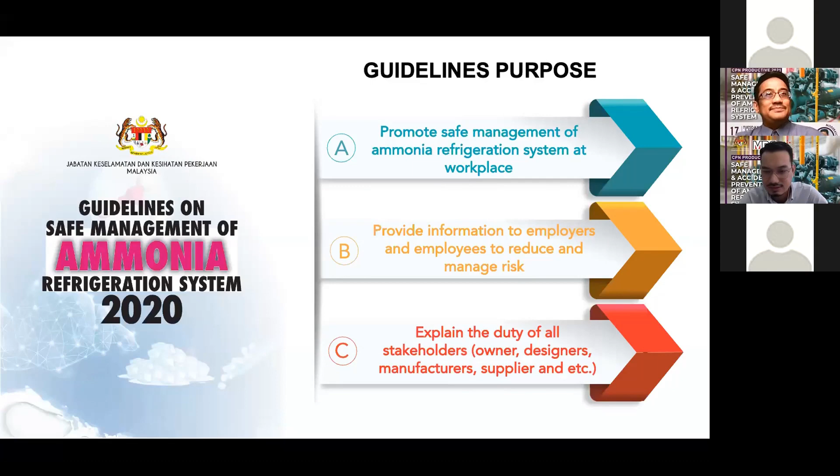Secondly is to provide information to employers and employees to reduce and manage risk, especially with respect to the ammonia refrigerant.

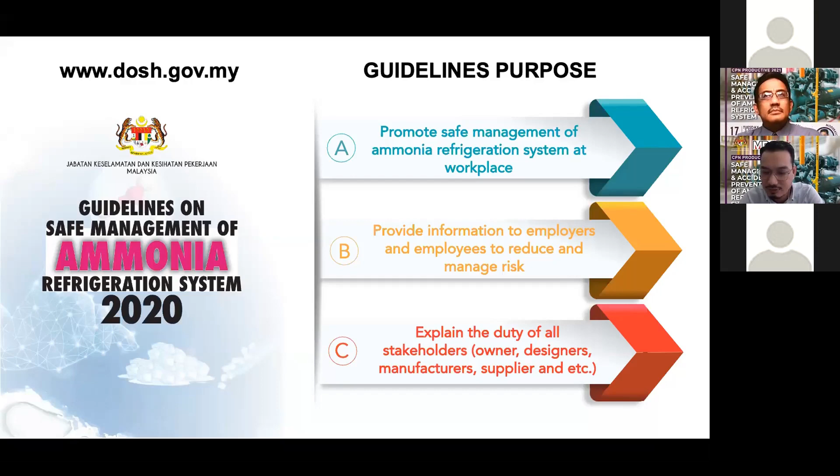Okay, so our focus is for the small medium enterprise, especially for the ice making industries, artificial ice making industries. But if this is applicable to your workplace, you might look into the elements of the guideline also.

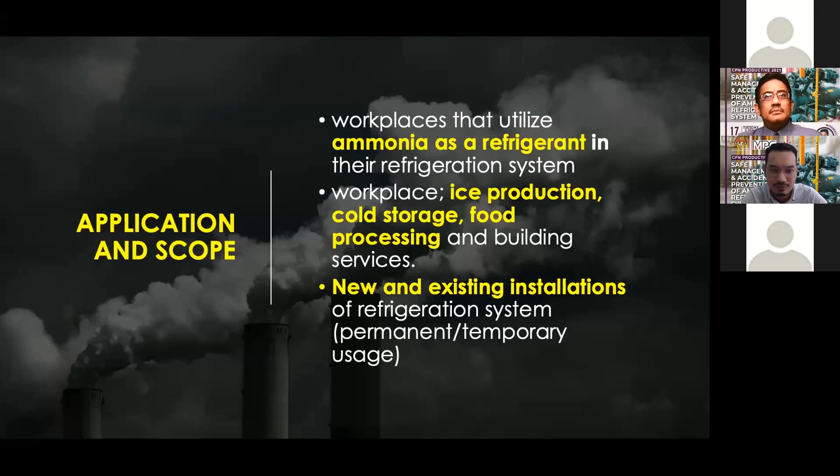Okay, first of all, this guideline highlights the mandatory requirement under the Factory and Machinery Act, which the owner needs to comply with if they have especially certificated machinery, then they have to comply with the FMA Act.

And for the workplace, the OSHA, Occupational Safety and Health Act, comes into place to ensure that the owner of the workplace who creates the risk is able to manage the risk to protect their workers from any accident arising from their undertaking.

Other than these two main acts, there are regulations that describe more details on each provision of the acts, for the FMA and OSHA 1994.

Just for your information, this FMA will no longer be enforced, and it will be terminated. And the new OSHA will cover, I think, most of the provisions currently enforced under FMA.

And I think the first reading of the bill already went to the parliament for the first reading, and I don't know, in the future the Factory and Machinery Act will no longer be enforced by the DOSH.

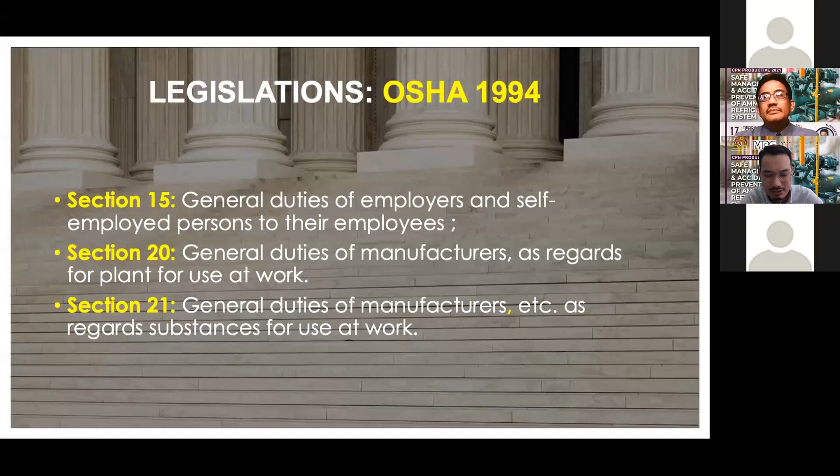And then apart from both Acts, there's a regulation supporting both. Under the OSHA, there is Occupational Safety and Health Control of Industrial Major Accident Hazard, known as CIMAH Regulation 1996. This is especially for chemical plants and major hazard installations.

And then the Use and Standard of Exposure of Chemicals Hazardous to Health regulation, 2000. Of course, ammonia is one of the hazardous chemicals to health.

And then for the suppliers, they need to comply with the Classification, Labeling, and Safety Data Sheet of Hazardous Chemicals, known as CLASS regulation 2013.

And there's a new regulation regarding noise at the workplace. Actually it's not new, but there's a new version. Before this, it was enforced under the Factory and Machineries Act. Now noise exposure is under the Occupational Safety and Health Regulation 2019.

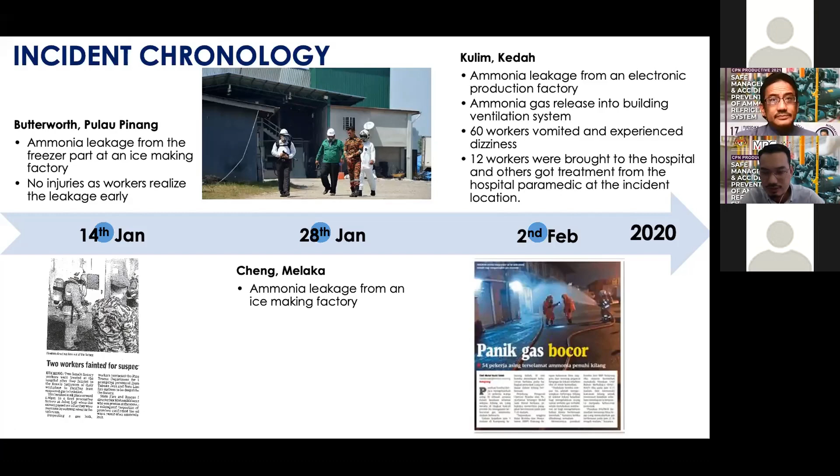Then in 2019, there's one case in Kajang. This, the public was exposed to the ammonia while shopping adjacent to the factory.

You need to know, sometimes this ammonia ice making factory is just a shop lot building. It's not a proper factory building. And he was stable after getting treatment from the hospital.

And in 2019, there's one case I will share in detail with you. It happened at a poultry processing factory. 26 workers experienced breathing difficulty, while nearby, about 120 students from a nearby school were evacuated. Luckily, no student was affected.

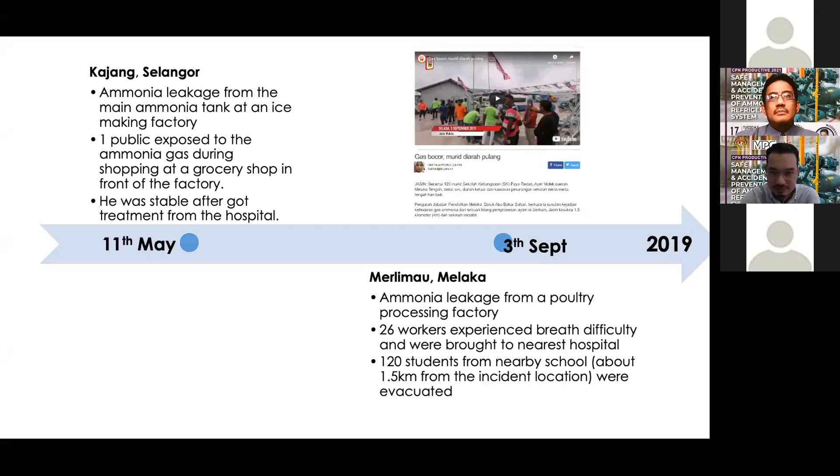Back in 2018, there were 3 reporting cases. Actually 2, but for Shah Alam, it's the same location, same facility. The first on 30th August, 2 workers dead. This one, when I was in Selangor State Office, I was involved in the case, and 18 workers were injured due to breathing difficulties. All of them were foreign workers from India.

One case happened in Perlis, also from an ice making factory. Two were hospitalized. For the third case in 2018, same facility, 3 days after the cases there was a release of ammonia to the school nearby the factory, and this affected 4 students from the school.

In 2017, there were 3 reporting cases. The first one involved also an ice making factory, 3 people brought to the hospital. One happened in Sabah, one worker fainted, and the other one also an ice making factory, where 3 workers were seriously affected and sent to the hospital.

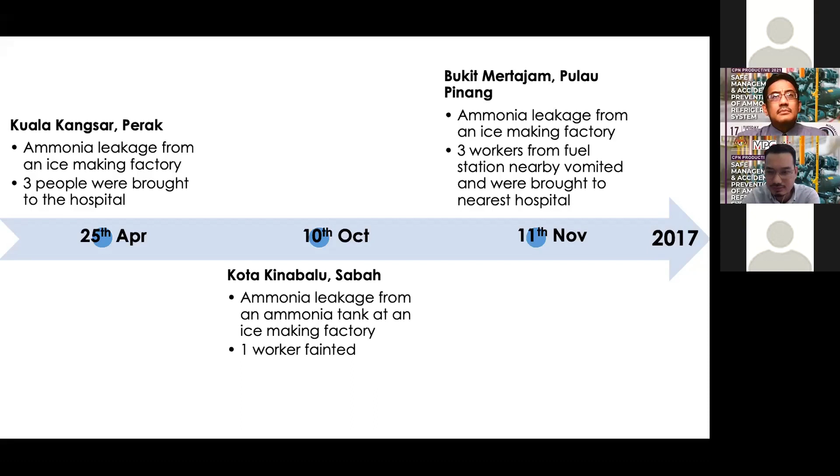In 2016, there was no reported case. In 2015, there were 2 cases. One also an ice making factory, which involved the public - 50 people from 4 families were evacuated. And one in Selayang also involved this ice making factory. This is the reason why we focus on the ice making factory.

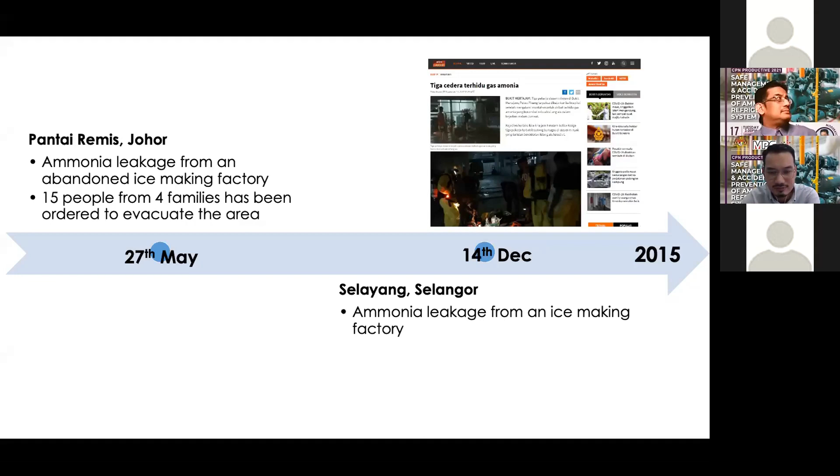We see that most of the cases occurred from this premise. Okay, so this is our plan to improve, addressing some of the questions from the participants.

So at the early stage since 2019, we have developed a quick guide to handle ammonia leaks. This is because of the alarming situation. We published a guideline first, and then we had a series of workshops with the ice making factories nationally. There were a lot of workshop series. We called all the ice making factories to involve with the workshop to get their input.

And we also have research with UPM to study the issues. And then we focus our enforcement on the workplaces that use ammonia as the refrigeration system. This is not only for the ice making factory, but also other factories that use ammonia. And then we have issued the DOSH instruction letter to the respective industry. I think this was back in 2019.

And from that year, we developed this guideline. I was involved with this committee to draft the guideline because I was involved with many cases involving accidents. So my input has been put forth in this guideline. Also, I shared some case studies in the guidelines. And we had an awareness program before the completion of these guidelines.

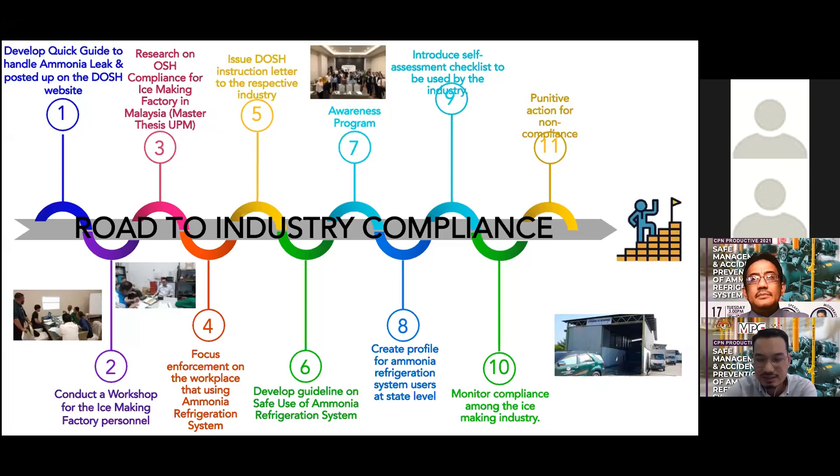Okay, in this guideline, we highlight the stakeholders' duties and responsibilities, especially the designer, manufacturer, installer, owner, and also the ammonia supplier.

Okay, for the designer and the manufacturer: first, for the refrigeration system, they must ensure they comply with our relevant legislation, and it must be constructed and safely designed. For the refrigeration system, some of the machinery requires design approval by DOS. We also do design approval, and the setup of the operation system must be safe with a proper manual provided, and they need to resolve any technical issues arising from the installation of this system. And of course, to ensure the long-term stability and safe handling, they need to prepare the maintenance program.

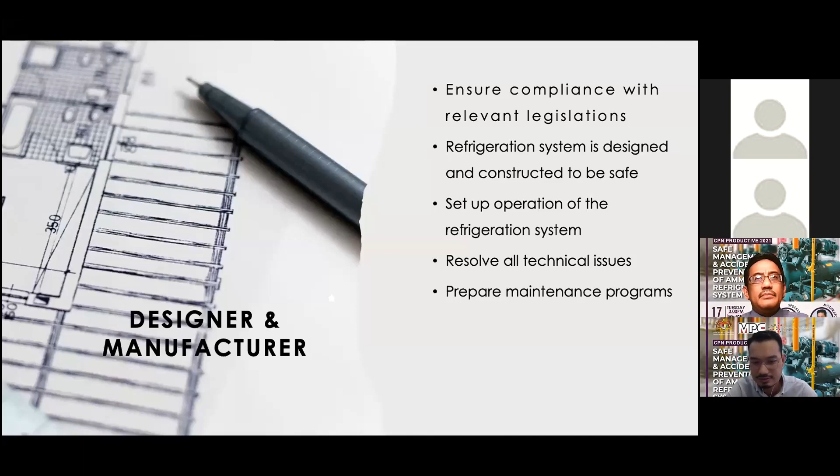Okay, then we highlight the duty of the supplier and the installer of the system.

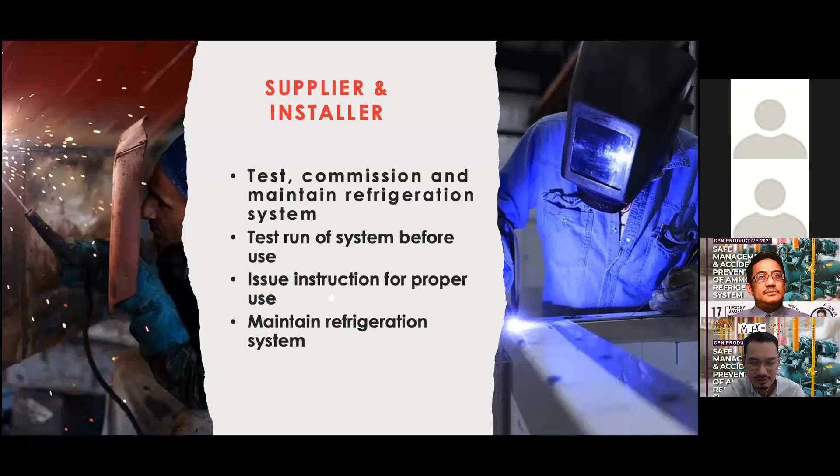They need to test, commission, and maintain the refrigeration system. Test run of the system before they use it - this is for the commissioning. And issue instruction for proper use, I mean the manual for the safe use of the system, and to maintain the refrigeration system.

And for the ammonia supplier, they need to be aware of the labeling and the safety data sheet to supply to their client. They need to develop SOP and risk assessment, especially during the transfer and filling of ammonia to their client. And they need to obtain the permit to work, PTW, from the owner before they do anything. And also provide training to the ammonia handler.

This is a requirement under the regulation of OSHA.

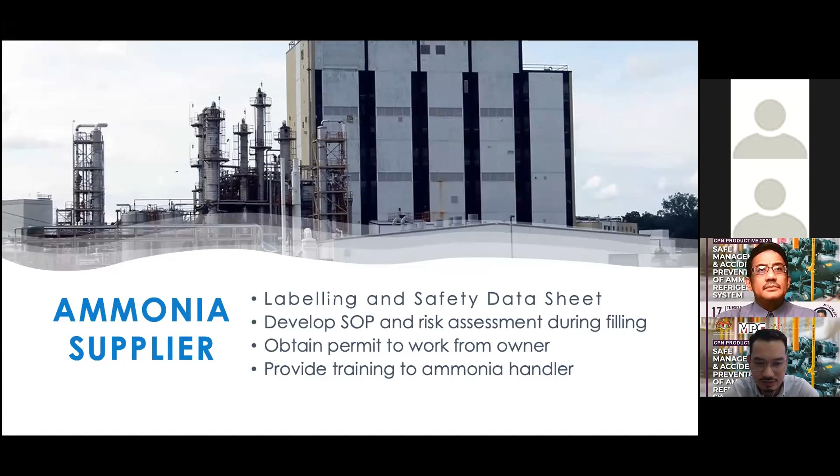And then, of course, the owner - there's a lot of things he needs to ensure their workers are not affected by the refrigeration system. First, they need to have the risk assessment and also the chemical health risk assessment, CHRA. This is the first thing they need to do.

And then the maintenance and inspection of their system must be adequately conducted. And for the documents, they must keep and maintain, especially when there's a request from the authority. This will be helpful when they repair their system.

And then for the workers, they need to provide proper PPE. And then you need to develop the safe work procedure, emergency response plan, of course. And the information and training they must provide to their workers.

And the accident reporting - some of the cases, when we investigate, it was not reported by the owner, but it was reported in the news. Then we do the investigation because this is a requirement under the notification of accidents.

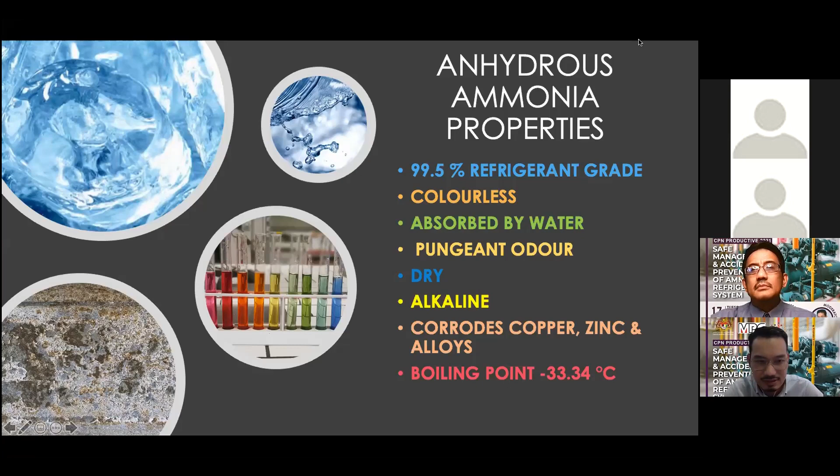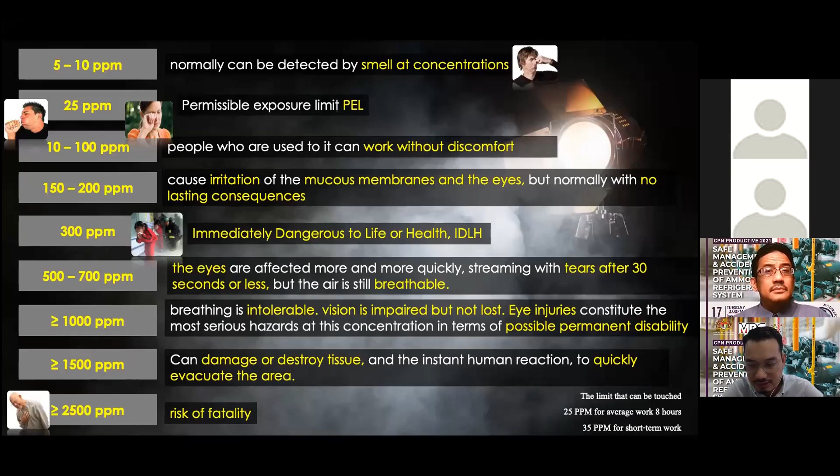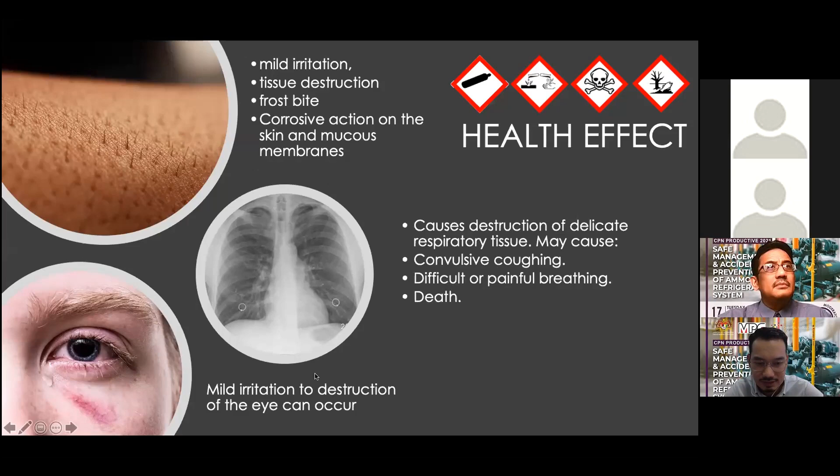Okay, this is the effect on your body. For the skin, you have mild irritation, can cause tissue destruction, can feel like frostbite, and corrosive action on the skin and mucous membranes. For your lungs, it can cause destruction of delicate respiratory tissue, convulsive coughing, difficult or painful breathing, and may also cause death. And for your eyes, it might cause mild irritation to destruction of the eyes.

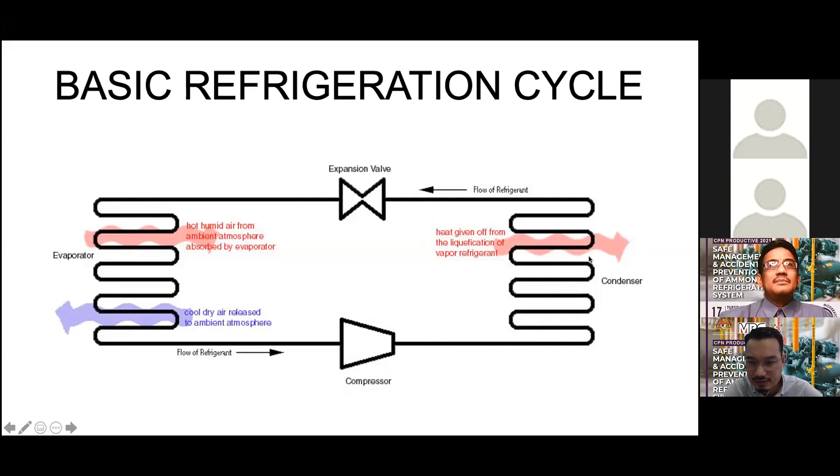Okay, this is the typical system, a single stage refrigeration system, which has the expansion valve, the evaporators, receivers, liquid separators, condenser, and compressor. It will be interchangeable from the vapor: low pressure vapor will be compressed into high pressure vapor, will circulate into the condenser, and come in as high pressure liquid. It goes through the expansion valve, and will flow through all the system for evaporators to produce ice or to cool our food products.

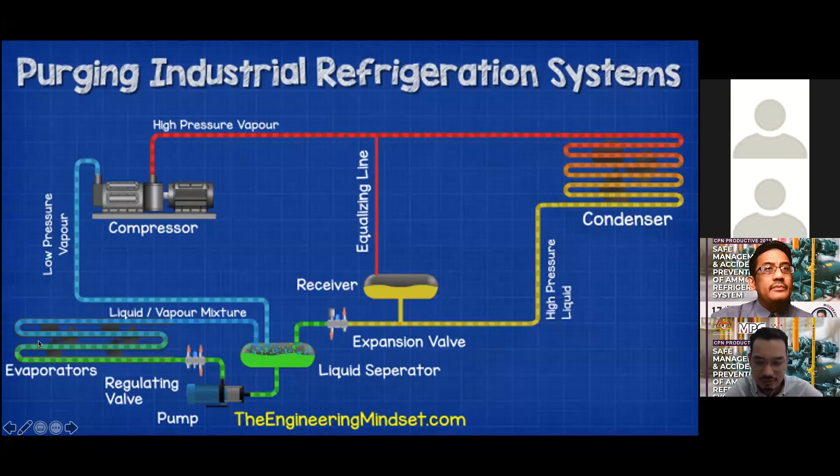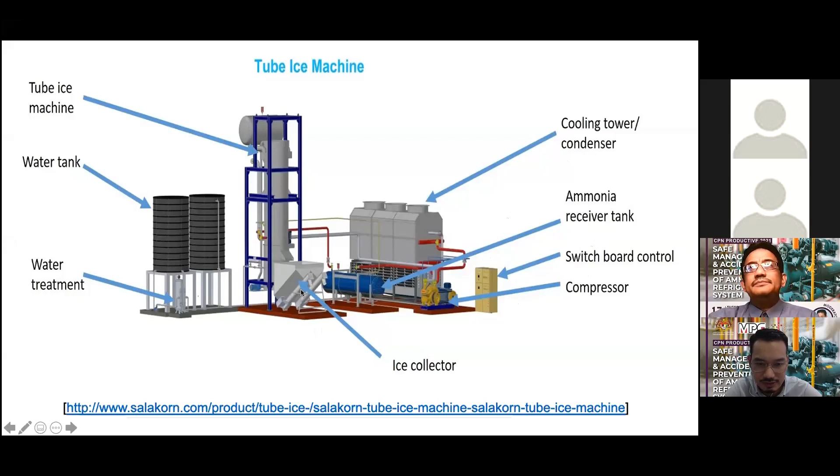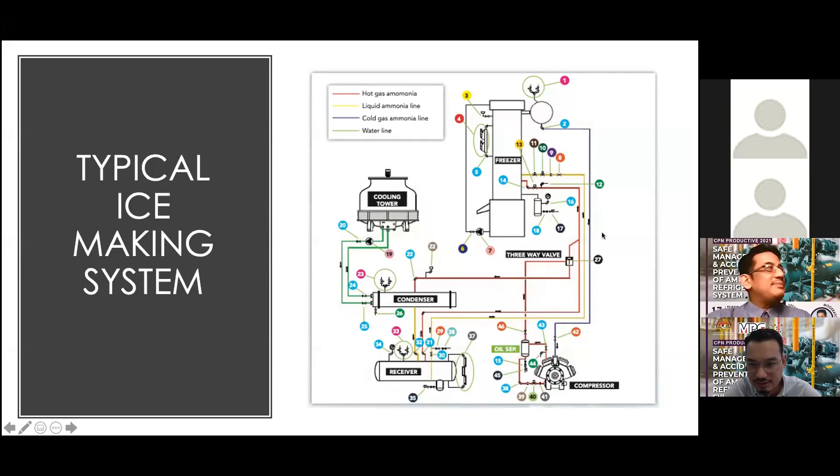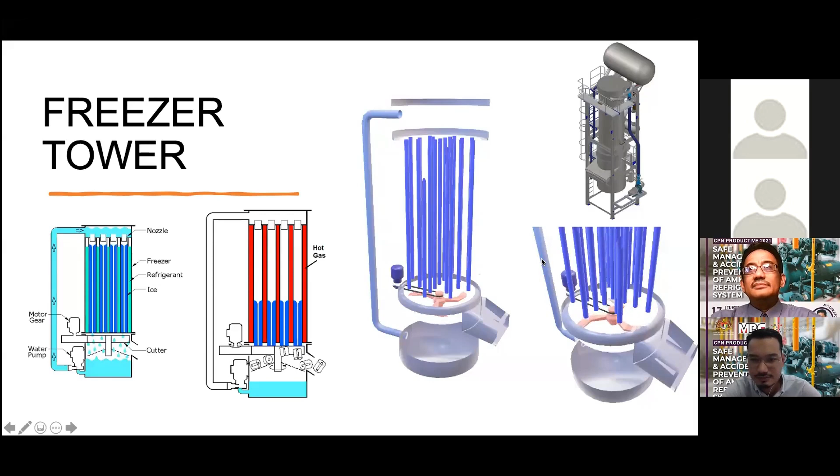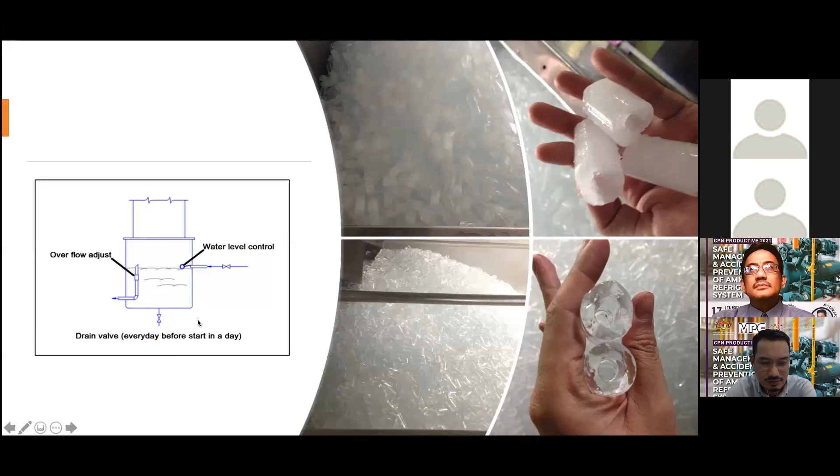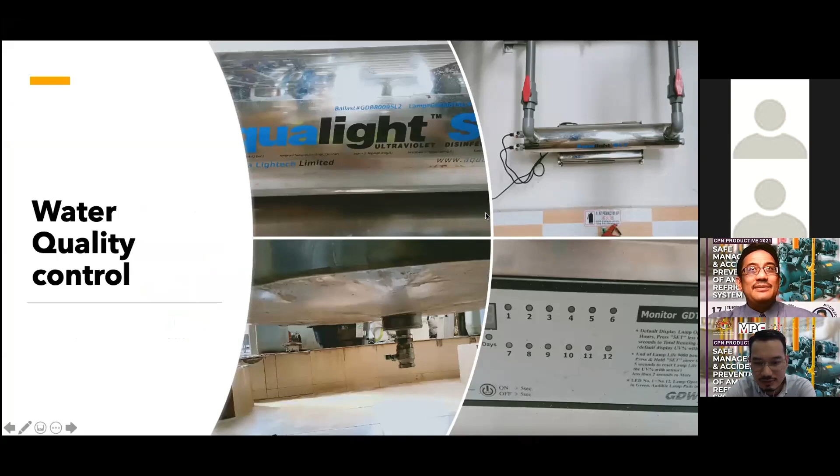And every day they will check the water level to ensure that the system is running okay. For the water quality, you don't have to worry, because they have this UV disinfection, and it's controlled by our KKM, our Ministry of Health. So they need to comply with the requirement by our KKM.

For the design, all vessels shall be designed and manufactured according to internationally recognized standards or codes such as ASME, EN or BS standard. All joints must undergo NDT testing as required by the design code, depending on the design approved by or designed by the designer. All materials used must be suitable for the ammonia refrigerant at the considered temperature and pressure to which the component shall be subject to. So these are some of the international standards that can be used as reference to design the refrigeration system for ammonia: IIAR, ASME or ASHRAE. These are some of the popular standards.

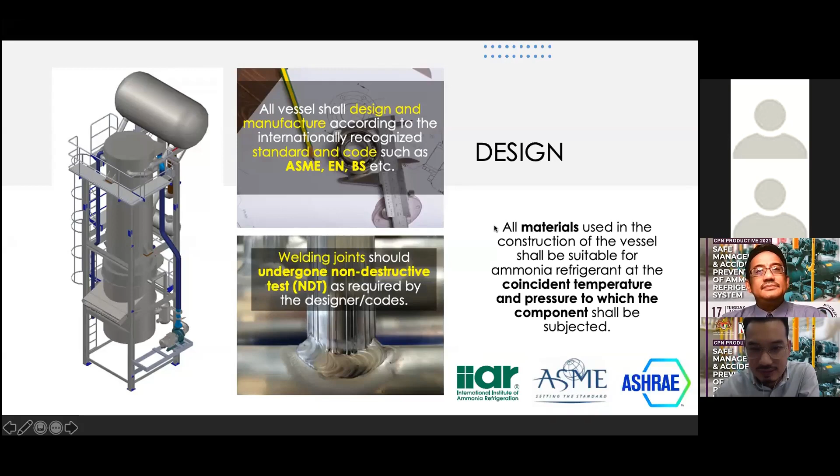So for the requirement of certificate of fitness for the UPV, because the tower of the ice making machine is a UPV, an unfired pressure vessel, it's spelled out under the boiler UPV regulation. This is what's related to the safe use of the refrigeration system.

And it must be renewed every 15 months by DOSH.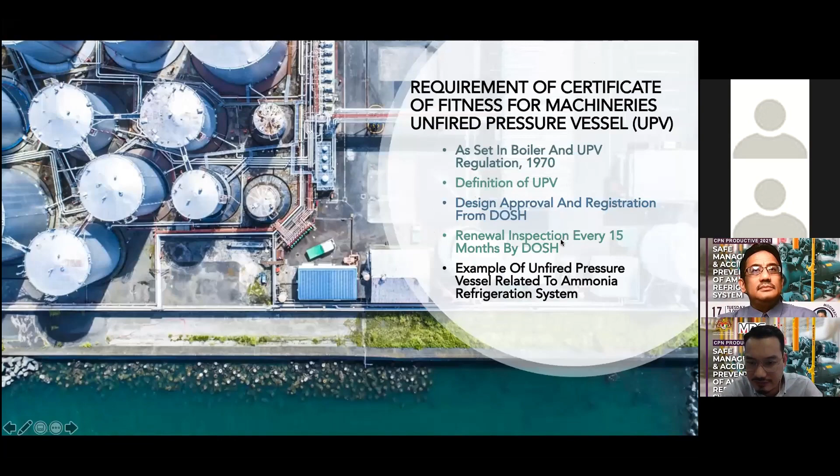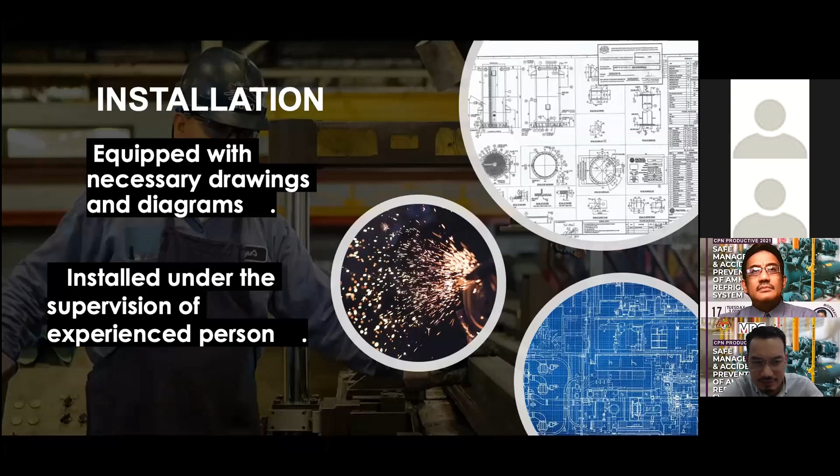Okay, for the installation, the supplier must ensure that it is equipped with the necessary drawing and diagram, and it must be installed under supervision of an experienced person. For the startup, all the piping, electrical equipment, and insulation must be properly installed.

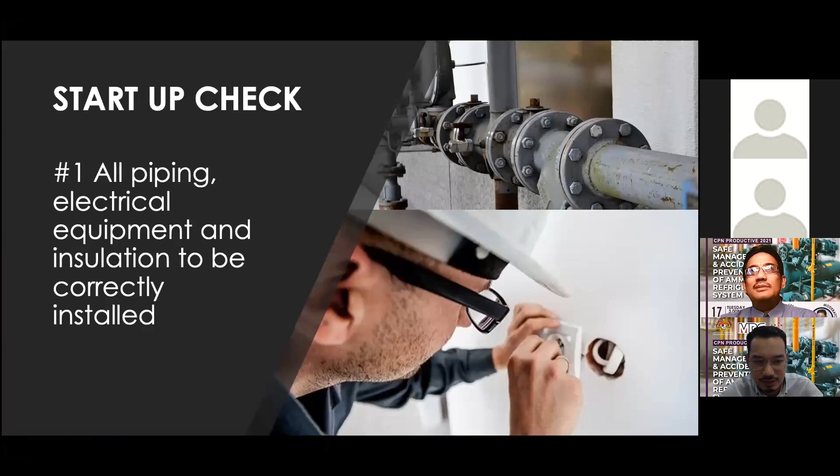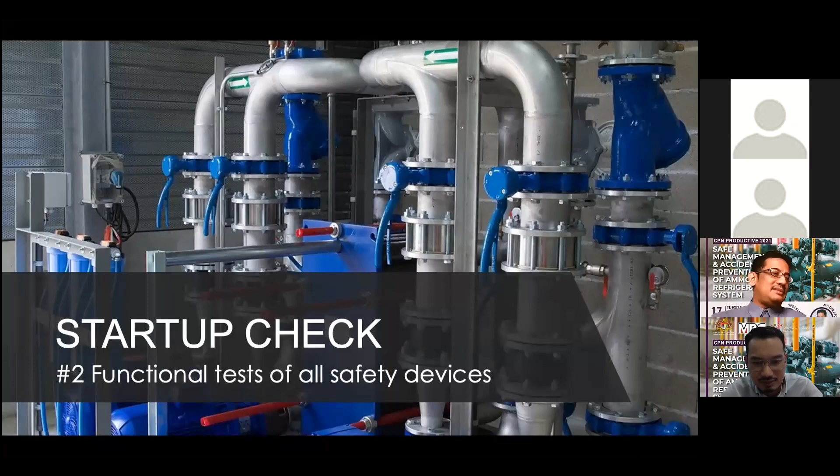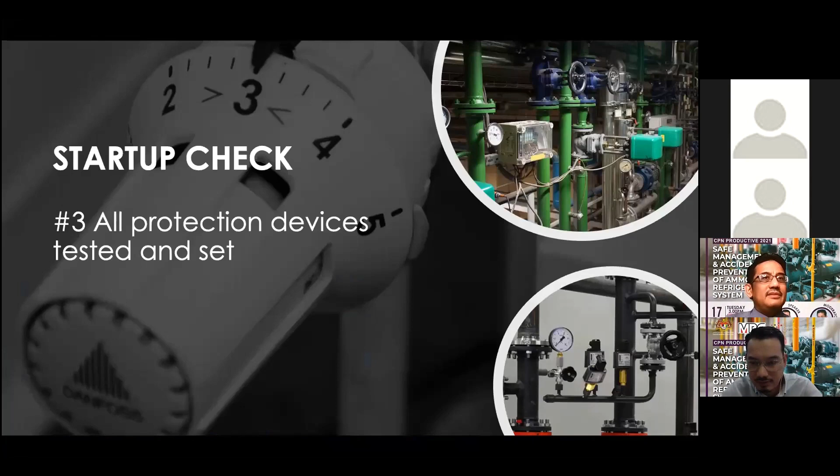For the startup of the system, functional tests of all the safety devices must be conducted before they can commission their system. And all the protection devices are tested and set properly. It must be pressure tested.

So our committee had a chance to witness one of the setups of the system in Klang, and they did the pneumatic test for the system. It took about, I think, 72 hours to complete the test.

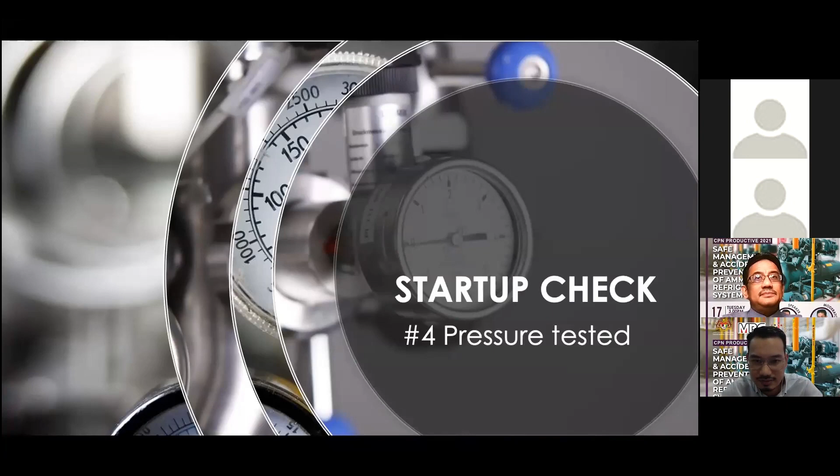And the owner and contractor should witness and verify all the tests and inspections. And it cannot be put into operation until it has passed all the tests and inspections set by the designer of the system, like the pressure test, the vacuum test for the piping, or maybe the NDT test.

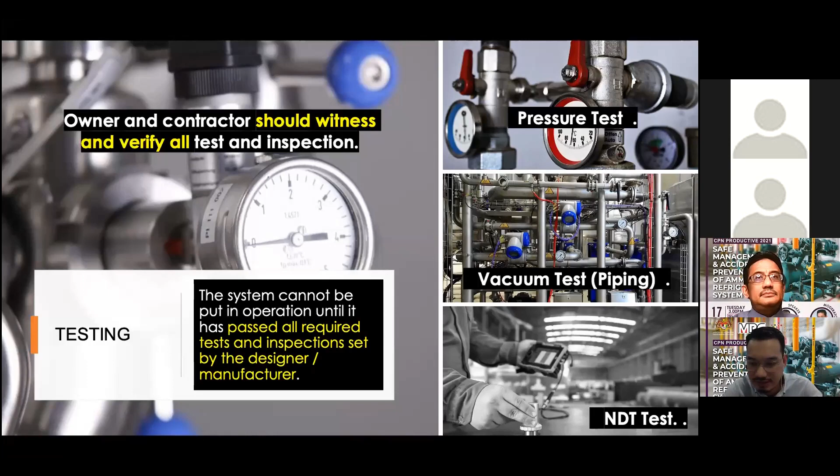Okay, before they charge the ammonia, they must ensure that the machine room and space are safe. And they must prepare first aid and safety equipment available at the site, and they must notify all the staff at their place that ammonia is being used.

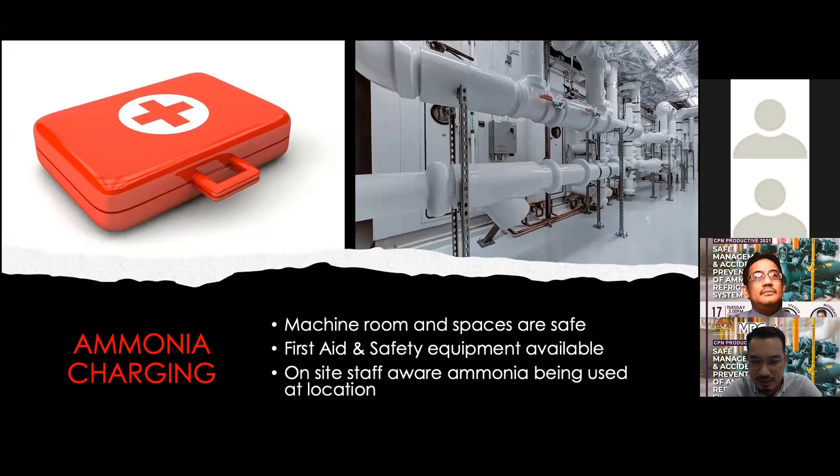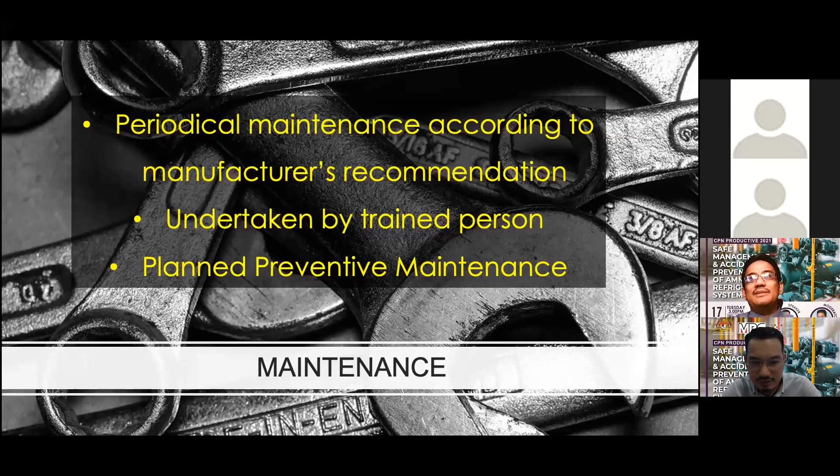Then for the maintenance, they must ensure periodic maintenance according to manufacturer recommendation, and this must be undertaken by a trained person. And most importantly, to have a preventive maintenance program.

Okay, and if they want to change anything with their system, they must ensure the original spec of the component should be used, and they need to have sufficient information before carrying out the maintenance, especially for the service provider, and conduct a risk assessment to ensure that there is no risk of accident during the maintenance.

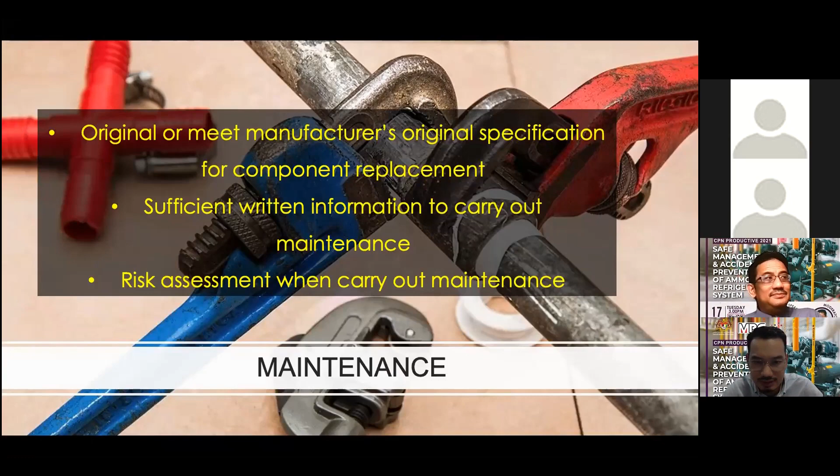Okay, for anything related to modification and repair of the UPV, the vessel, or the refrigerant, they need to notify and get approval from DOSH before they do any modification or repair.

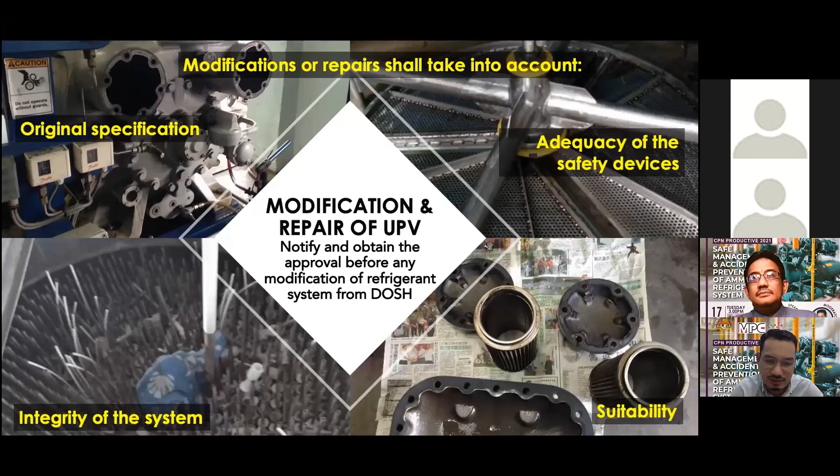And they must ensure that the component is original, and they provide adequate safety devices after the modification, the suitability of the component they use, and most importantly, the integrity of the system after their repair works is complete.

So for the training, this is what we highlight. You can see in detail the training matrix we provide in the guideline in table 3. The practical training for the workers, the system maintenance for the supplier, the act and the regulation, what they need to know, and the occupational safety and health management.

This is for the owner, the plant supervisor, and also the workers.

The emergency response plan, the important elements to be included are the evacuation, notification, local emergency service, communication system, especially during the release of ammonia.

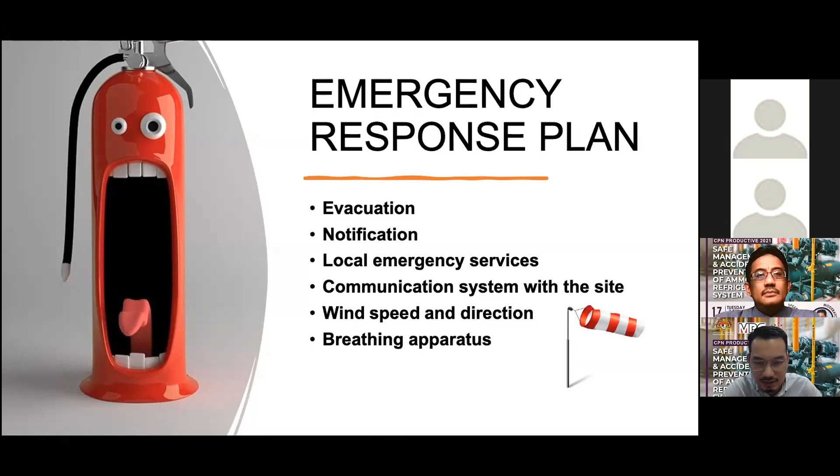And this is important, you need to have the wind speed and direction, especially during the evacuation, and also the breathing apparatus. So we provide details in the guidelines, and some examples that may be used as a reference to develop your own emergency response plan.

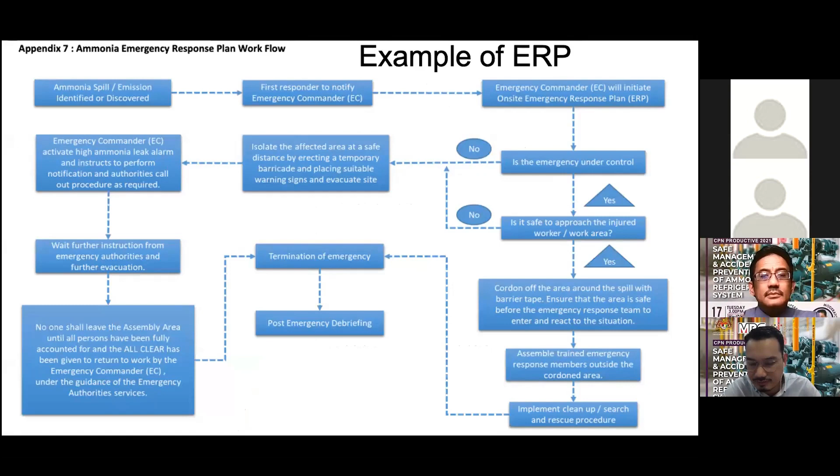So you need to have an agreement to ensure your system is maintained. The legal register, anything that relates to authority with respect to the refrigeration system, maintenance and operation record, CF, training record, safe working procedure, modification and repair works, document related to ERP, P&ID.

I think it's most important, especially when there is a release of ammonia, then you need to know where the release is. This is the most important reference.

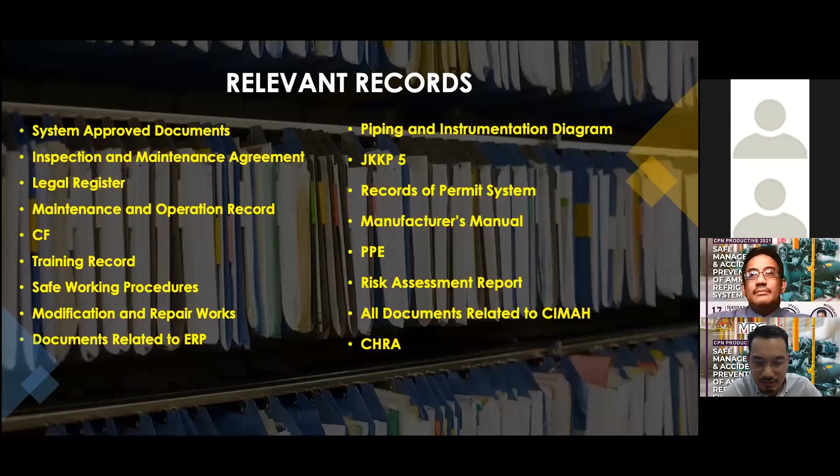And then the JKKP 5, record of permit system, manufacturer manual, PPE, risk assessment, and anything related to CIMAH, like DOSO, demonstration of safe operation for those non-major hazard installations, and last but not least, the CHRA.

And we provide with the guideline one checklist, and if the owner uses the checklist, they might comply with the regulation, and most importantly, prevent the accident.